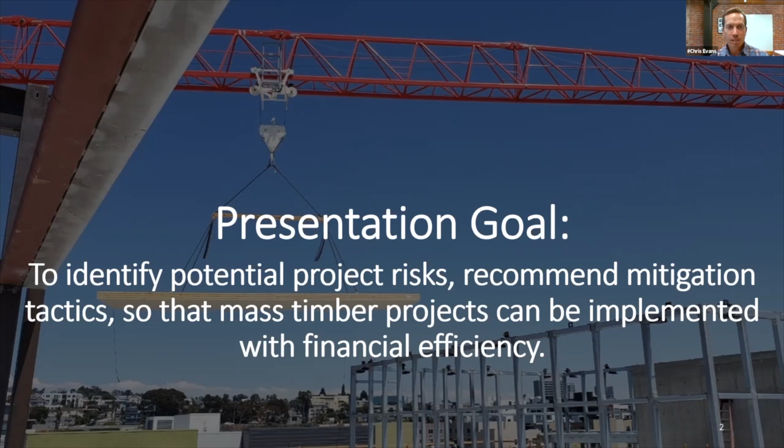So today, we want to identify what some potential risks are, educate people of what those are so that a detailed plan can be put forward so that we're not just throwing money at risk, but we're throwing a detailed plan to capture risk mitigation. Here's an overview of the learning objectives for today in our presentation, and we'll go through these in more detail.

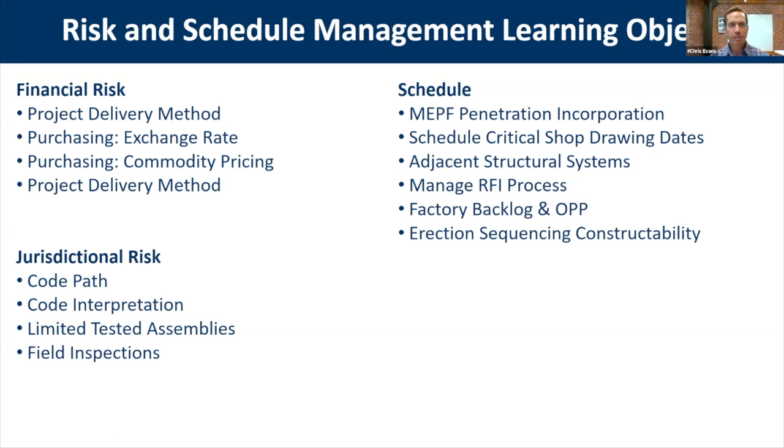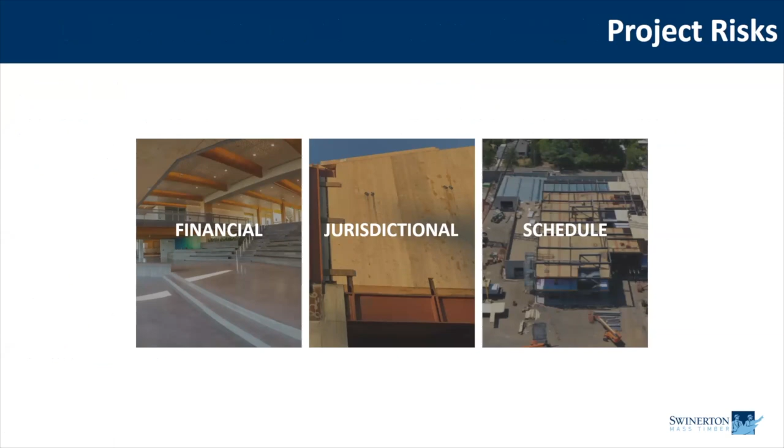Okay, so financial risk, jurisdictional risk, and schedule risk. These are the three main subject matters today that we're going to discuss. And we'll start with financial risk. So project delivery method. We'll go into details on why that is a risk to the project financially. Purchasing with exchange rates, and purchasing with commodity pricing.

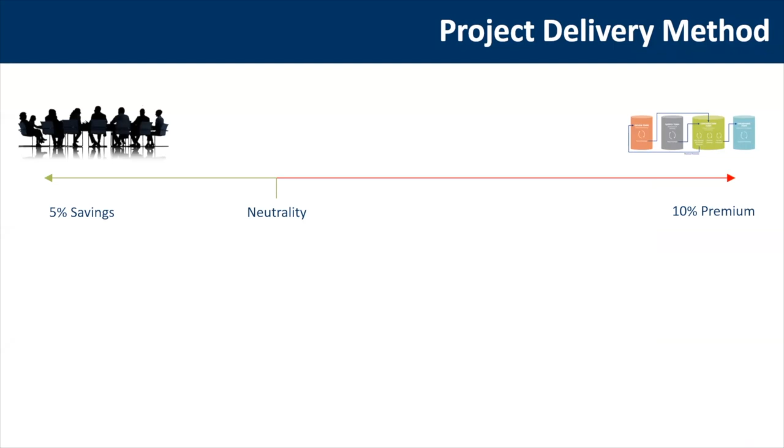So first, our project delivery method really has two different approaches. In the first approach, we have the CMGC, Design Assist, GCCM, design build type of deliveries. Really, we see that as a bunch of partners sitting at a table, joining hands, teamwork together to start to solve problems and plan out the project. Teaming approaches early in the project's design cycle, we really feel is a benefit with mass timber.

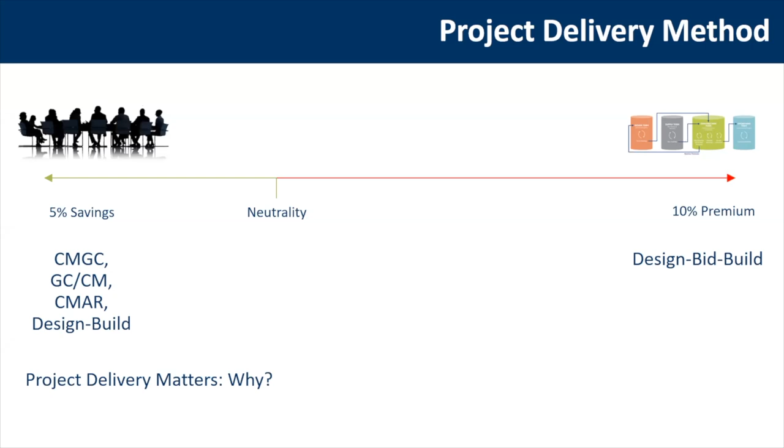On the right side, a design bid build approach, really more traditional approach in procurement of projects. We'll talk why there's some not so good things about that type of approach with respect to mass timber buildings. So project delivery matters, but why? First, there's a ton of new products, new lingo, and new things to think about.

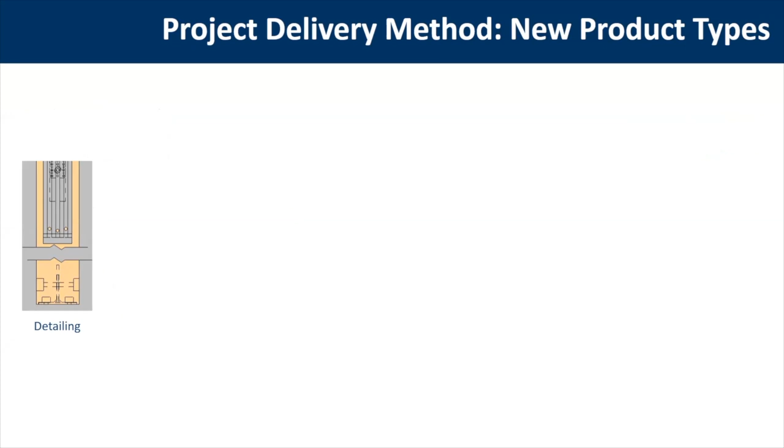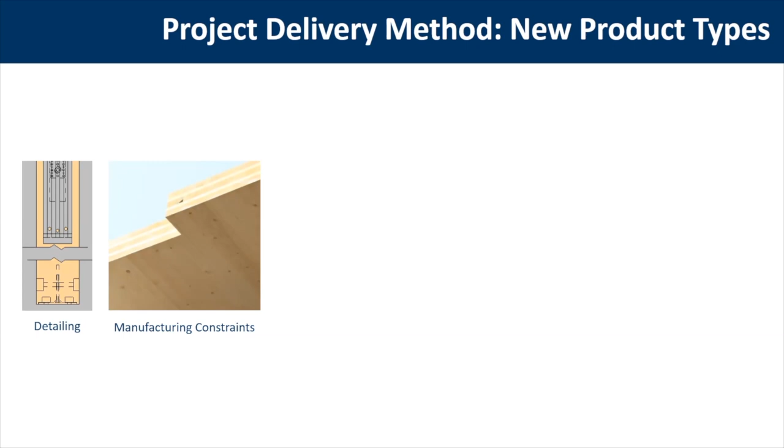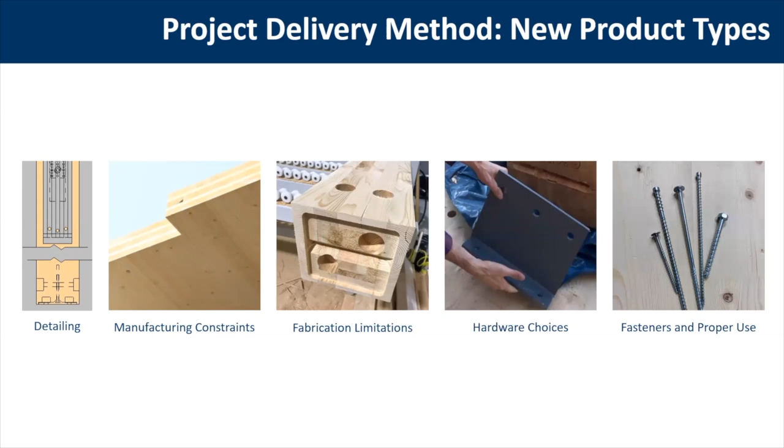The detailing effort that's required to go in to make a prefab kit of parts approach for a mass timber building. The manufacturing constraints. Each manufacturer has different setups in their facilities, which then impart different constraints to what they can produce. Fabrication limitations. Each different type of CNC machine does have limitations on fabrication. There's a ton of different hardware out there as well, proprietary hardware or custom hardware. And then finally, fasteners and proper use of fasteners. There's a lot of different fastener types.

So the risk here is that there's new and unfamiliar products, and that can lead to not optimizing the design. The goal of partnering is to get educated on what these constraints are, limitations, and proper uses, and gain that technical knowledge and know-how from industry experts to save money on the project and get to an efficient design.

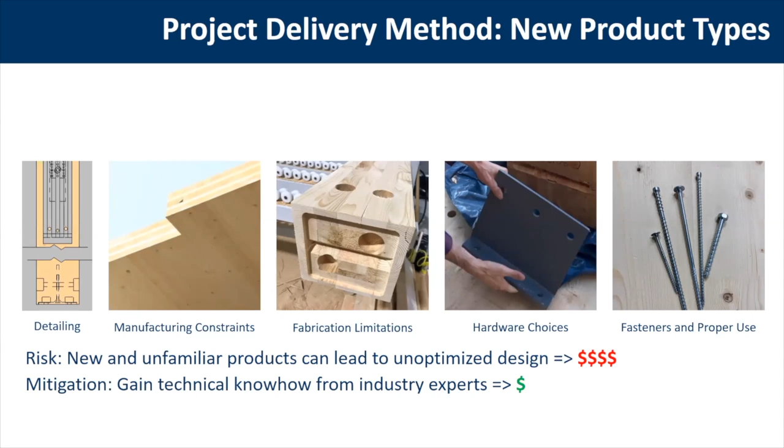If you really think about it in a sense, we've been building with steel and concrete for many, many years, and everybody's very familiar with how to put those systems in place with an optimized design. The first go at a mass timber building, though, we don't have those years and years of lessons learned like we do in those other industries to get to a comparable optimum design. So the goal is get partners on board so that we can get the lessons learned brought to the team and get that first pass of design to be very efficient.

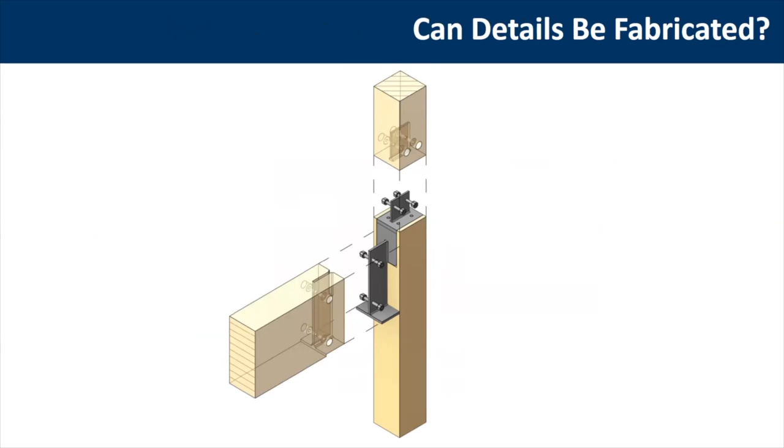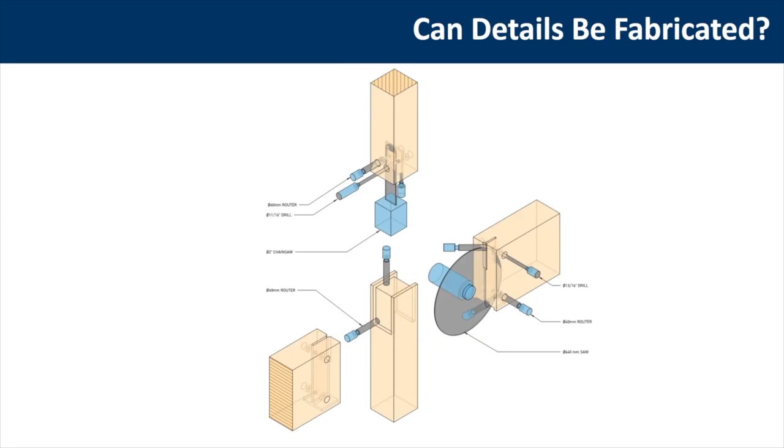Okay, so big question is, can details be fabricated? It was one thing to look at a set of plans in 2 dimensions. It's another thing to start to bring that into 3 dimensions. But looking at how it gets tooled and cut is really important. That's something during the design process to look at the constructability, or rather fabricatability of certain details, and understand, can a CNC machine cut those details, or is it fabricatable? What do we need to do maybe to alter design slightly to make it more efficient and more cost efficient with CNC time?

Next, exploding those details and really understand if it can be installed. Are there limitations or issues that cause those details not to be installed efficiently or to cause pain during installation? In a nutshell, if we get to really well fabricated details in a mass timber building, it usually leads to easy to install details out in the field. That's the goal: quick install in the field and fabricatable details.

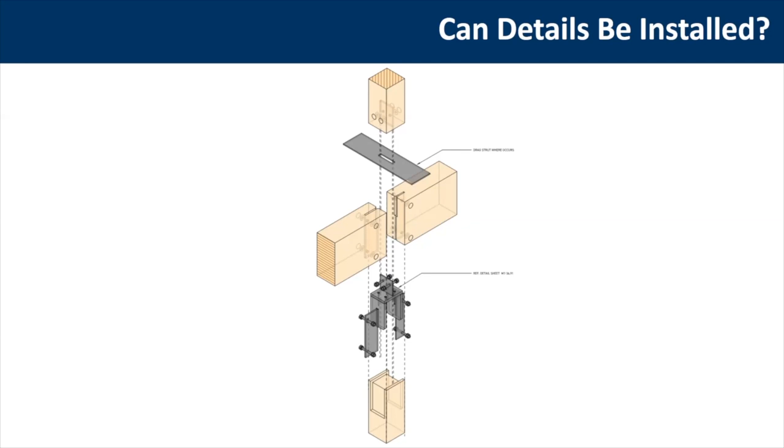So one aspect of why the design assist approach works in reducing project cost is getting to an optimized design by making sure that the details of how things come together are well coordinated.

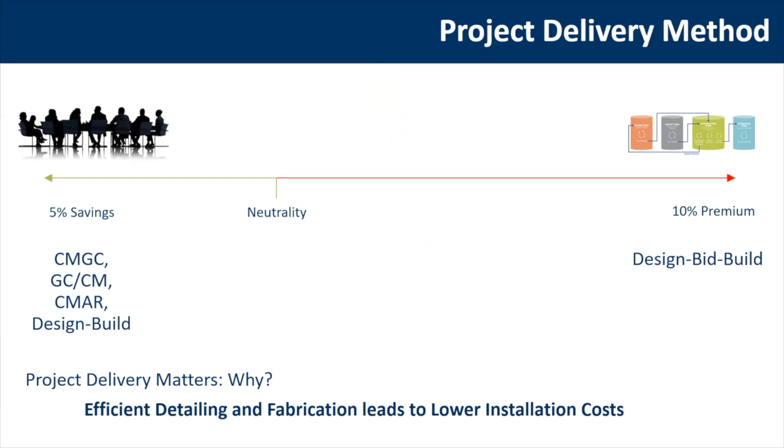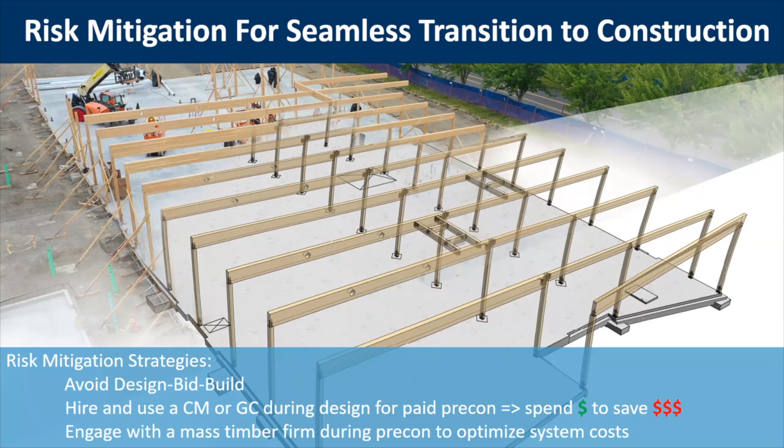Risk mitigation strategies: avoid design-bid-build, hire and use a CM or GC during design for paid pre-con. Spend a little bit of money to save money on the project. And then engage with a mass timber firm during pre-con to optimize system costs.

That is substantial. The margins on these projects with contractors and suppliers going at them is not that great. That exchange risk is passed on to ownership and contracting teams. So it's a risk for the project. We need to be conscious of that. So how do we be conscious of that? We get ahead of it.

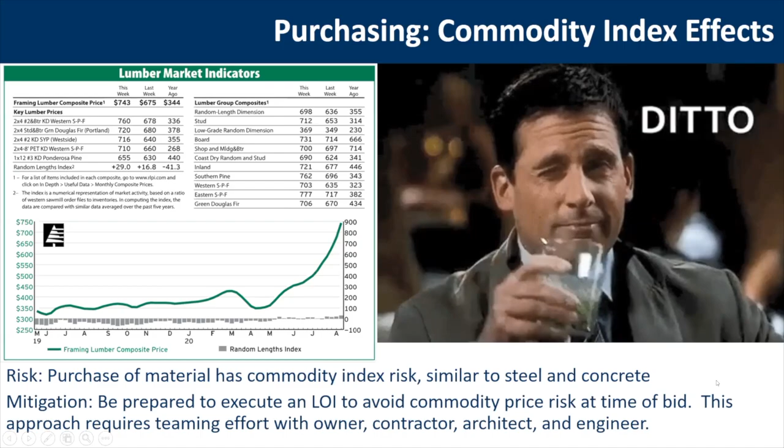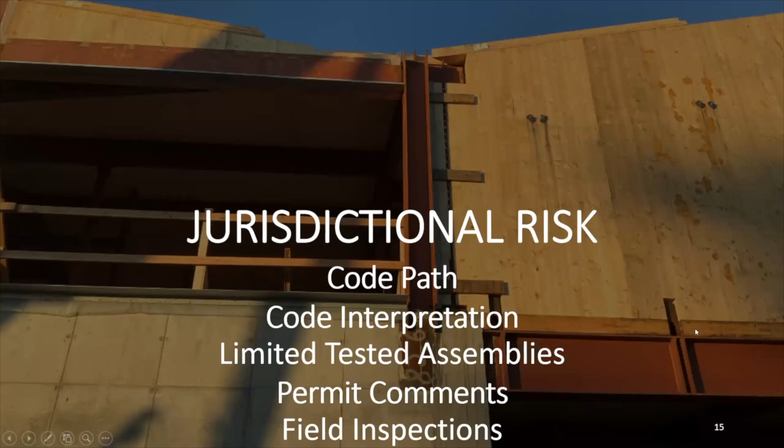Okay, jurisdictional risk. Code path we'll talk about: code interpretation, limited tested assemblies, permit comments, and field inspections. So we have code—which code are we going to use for a project? The 2012 IBC, the 2015, the 2018. It all depends on the local state codes, what has been adopted, what modifications have been made, and really how they interpret it. Local code adoption influences what can or can't be done. There are differences with the use of mass timber just from 2012 to 2015 IBC. So it's good to know what the current code is for that jurisdiction and what is allowable.

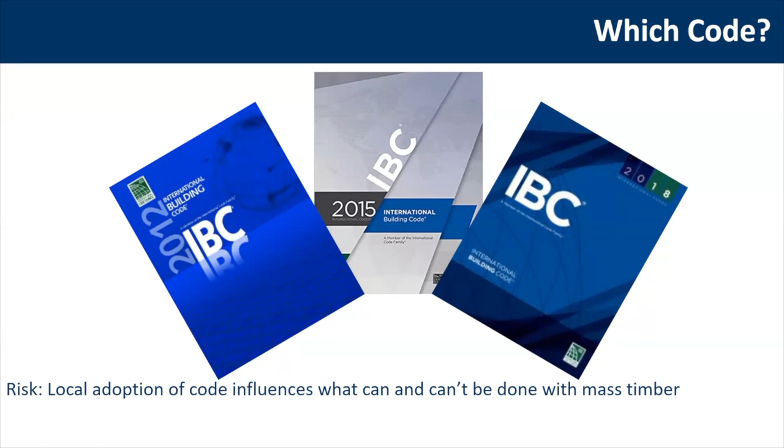Understand the code path and required variances at inception of the project.

A quick anecdote: the 2012 IBC for a Type 3A building doesn't allow CLT in the exterior assembly, whereas the 2015 code does. In a case in Oregon, we were under the 2012 IBC. One jurisdiction allowed us to use CLT in the exterior wall and approved a variance, while another city did not allow that. It's all based on local interpretation of code.

So what that means is each jurisdiction interprets codes slightly differently. The thing we have to do early on is meet with the authority having jurisdiction, have a pre-app conference, sit down with them, and discuss what the project is, what the project goals are, and what we plan to do.

See how they're going to interpret the code, what they see as risks for them, and then come up with a plan to mitigate those risks early in design, so those strategies can be put into the design documents. Then document and circulate those meeting minutes to ensure the team is on the same page.

This little step of being proactive with the jurisdiction will reap many good benefits, and we highly urge teams to do this. Okay, limited tested assemblies.

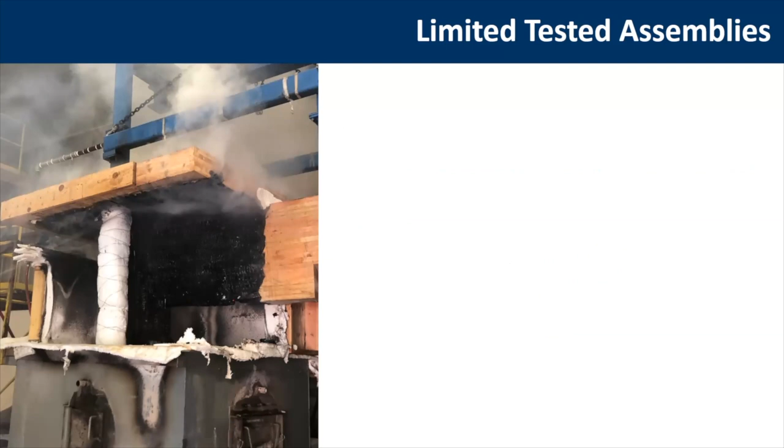There are limited tested assemblies. There's a lot, we're not going to list them all here, but we'll talk about a few: 2-hour shafts through non-rated and 1-hour rated floors, 2-hour rated timber-to-timber connections, limitations of tested connections, and loading in kips.

A good example would be 2-hour rated connections. There's a limited number that have been tested and approved. Certain manufacturers have gone through and gotten some of their own 2-hour connections tested.

But with the new Type 4A, B, and C buildings, which really require 2-hour rated connections or better for exposed members, the easiest way to go about it is having a tested assembly that was load tested under a fire condition.

The thing to really understand is it's not just about the minutes involved in getting these approvals, it's also about what the loading was on those types of tests. So tested assemblies may be required, and it may actually be more efficient for the project to proactively get a certain condition tested.

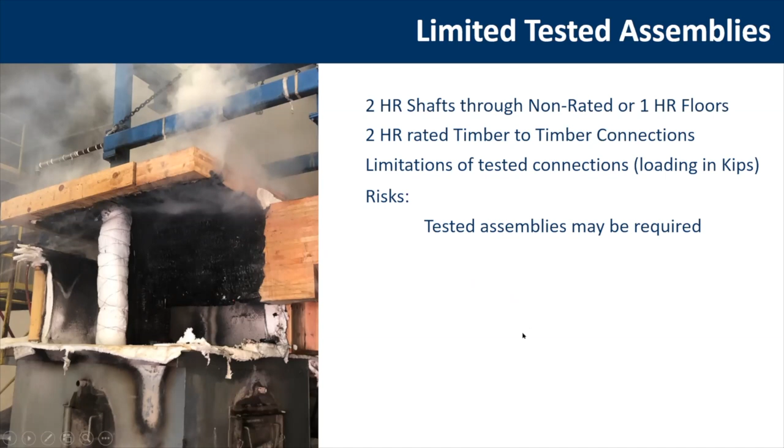The mitigation is to engage with consultants and system experts to determine what project details require engineering judgments or project-specific testing. This is really important early on in the project, to identify what would ever need an engineering judgment or project-specific testing if required.

Some projects are on the cutting edge, some aren't. So it's worth having that discussion early and figuring out what those project risks are, and again being proactive and getting ahead of it with a plan.

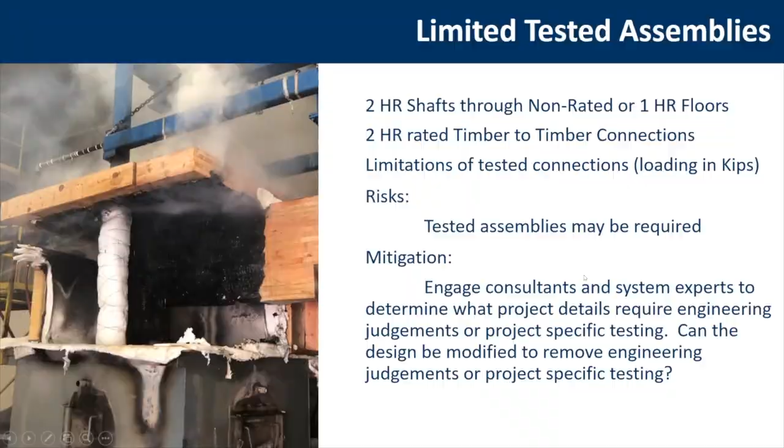Next, I love schedules. It's like my second favorite thing. Schedules are so much fun.

So, permit comments. It's really important to think that most likely permit submission and the shop drawing process are going to overlap. That's most likely going to happen on a mass timber project. It's important if we think about mass timber as a prefabricated kit of parts—we need to be proactive and do shop drawings early in the process after permit submission is done, but we're probably going to be waiting for jurisdictional approval and permit to be issued.

So most jurisdictions will provide early in the review process structural review comments. It's important to put this into the schedule for when that expected date is, and ask the jurisdiction how long it usually takes for their first review to get those comments back. Put that into the schedule and tie it to the logic with the shop drawings.

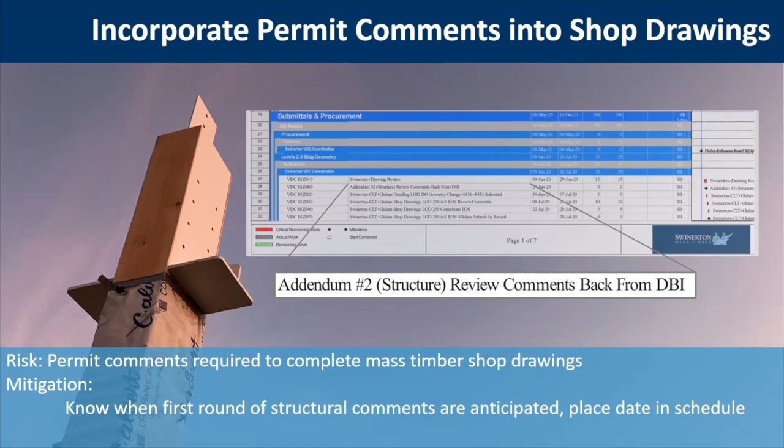There will be things that the jurisdiction has marked out that they're concerned about that didn't come through at that early meeting. You want to avoid a change in the middle of shop drawings, or after they're done, or when you start fabrication. So knowing this date and having a plan centered around it is important—not only know the date, but put it into the critical path of the schedule so the logic ties, makes sense, and is in front of everybody.

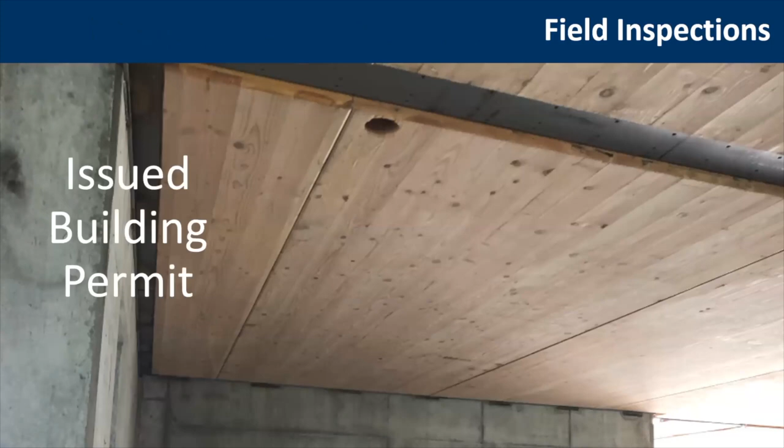Just because a building permit's been issued does not mean that it's approved for inspections. So what does this really mean? Approved permits are one thing, having a building permit and a document set. But when the inspector comes out, they're the last person that stands in front of commissioning that building, and they might view things a little bit differently, have a different code interpretation.

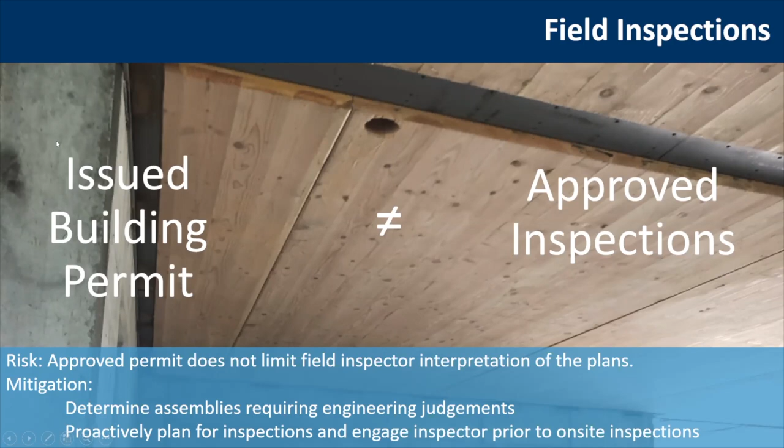So it's really important to be proactive, determine any assemblies that might require an engineering judgment. If there's not a specific UL assembly for a wall detail going into a floor slab, for example, you might need tested data or an engineering judgment to support that. Get ahead of that, understand which details might require that, and then also be proactive with the inspector. Have a job start meeting with them, sit down, walk through the project, see if there's any red flags that immediately come off the table, and engage them in the process so that they're your partner.

Okay, schedule risk: MEPF, penetration incorporation, schedule critical shop drawing dates, adjacent structural systems, manage the RFI process, factory backlog, and OPP. So we'll go into all of this. And then finally, erection, sequencing, and constructability.

Early MEPF involvement leads to schedule enhancement. If we do not engage our MEPF partners early in the project, we can't take full advantage of CNC capabilities for our wood products. Most of these wood products are going to be prefabricated offsite, hardware installed offsite, being cut on a CNC machine to allow the hardware to set in for easy connections in the field, and then brought out to site as a prefabricated kit of parts. That leads to the efficiency in building these structures. You're already there with that piece on the CNC machine.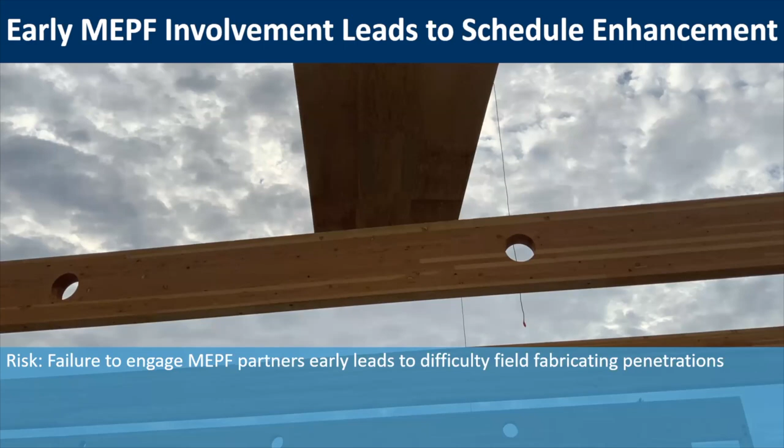This is different than concrete construction procurement, where you can do your MEPF coordination much later in the game. So that's why this is so important. It is a different mindset than building a concrete building. We have to bring this up into the project schedule and really understand that. So take advantage of the CNC technology.

Get this scheduled. And so when we're speaking of schedule, having a shop drawing schedule that's detailed and understood - at the top of this we see gray bars. The gray bars are for the design deliverables: the DD phase, the CD phase, the construction administration phase.

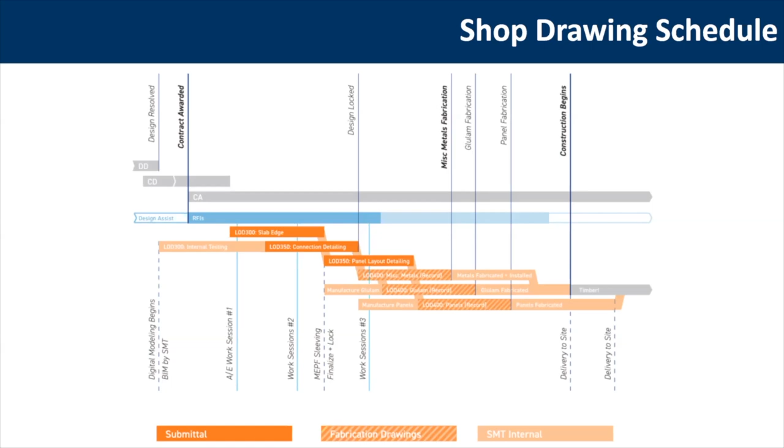And then on the hard orange, solid orange, are certain submittals. You're going to do a submittal for shop drawings on your slab edge, a submittal for the connection detailing and how the hardware comes together, and another one for your panel layout and detailing. Those connection detailing and panel layout detailing include those MEPF penetrations and sleeving. It's really important that we get that stuff brought in early. This really reiterates the need and desire to have a partnering approach to these projects, a design assist approach where we can bring on trade partners early to help facilitate efficient building out in the field.

Modeling of adjacent structural systems.

We don't want what happens in this picture to happen. This is a picture of a CLT panel having to be field cut to handle something that wasn't built per the model. The CLT in this case was built per the structural model, as was the steel, but we have an issue where the concrete wasn't built to that model, and it's harder to get the concrete modeled.

For foundations, basements, things like this project, contractors aren't used to coming in and providing that technology all the time. So having a plan not only to get the adjacent structural system modeled, but also making sure we're building to that model is important to limit waste in the field.

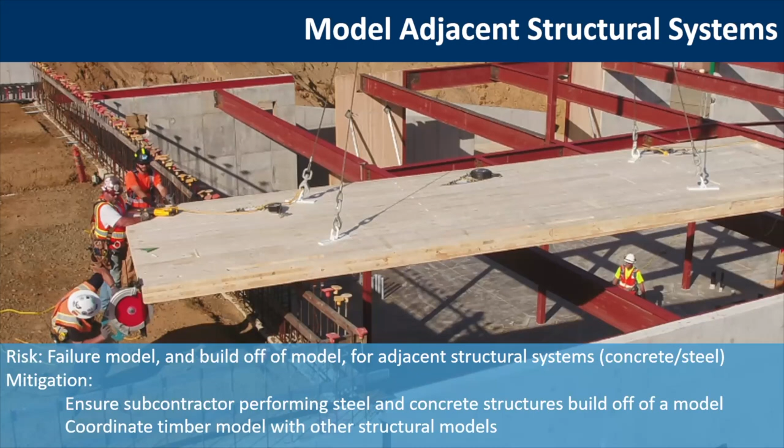What we see here is someone taking the picture, someone cutting, and a few people standing around, and probably a couple other people not in the picture that are equally standing around, all while we have a panel on the hook.

This is definitely the condition that we generally want to avoid. Okay, I promised not many construction details in black and white, so here's, I think, the only one of this presentation. So, RFI submission and response timing. The RFI process—there will be RFIs in a timber building, in most any building.

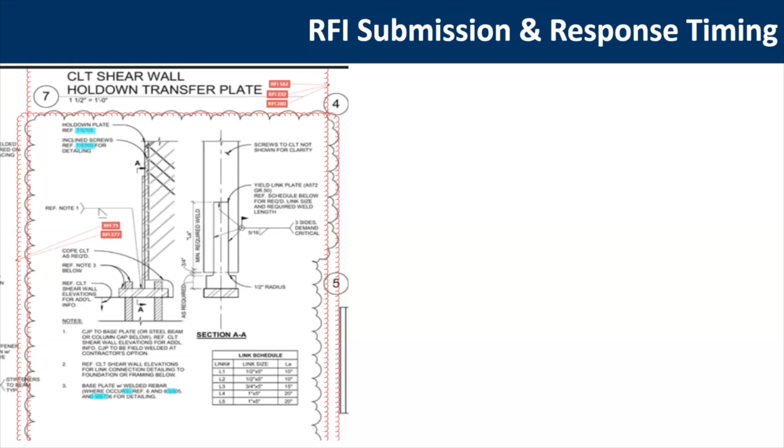What's important is that RFI generation usually starts at the highest level when detailing starts in the project. There might be questions about where the building sits, where it lies, what are the exact dimensions, and that RFI process needs to be quick and succinct.

So a protracted RFI process will lead to delays. It will delay fabrication drawings and development, and could push procurement or things to accelerate getting procurement done.

So what do we do? We look the RFI process in the eye and say, as a team, let's get through this quickly. Let's not have the 10 to 14 day response time for each individual RFI, but come together as a team and ask the RFIs quickly, then have teaming meetings scheduled over a 3-week period where you can have a couple meetings per week and get through the issues really quickly, talking through it as a team and agreeing on the path forward.

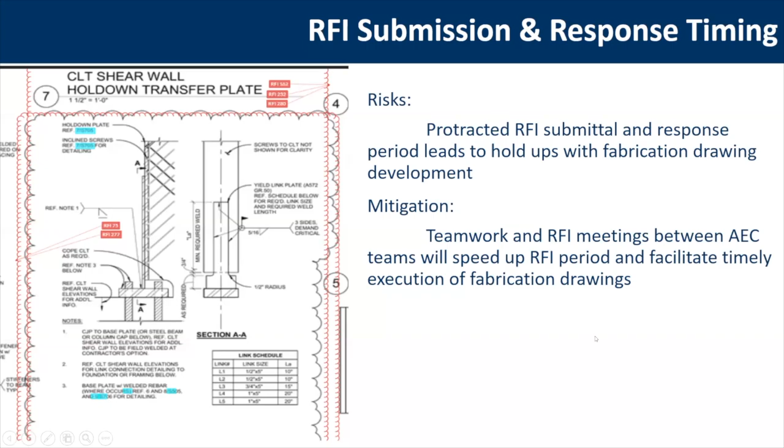Next, factory backlog and other people's projects. We take care of risk the whole way through for our project, mitigate risks, and do everything right. But at the end of the day, we're still getting a product manufactured in a facility, and there are other projects ahead of us. So when it comes time to procure and bring a manufacturer on board, it's really important to know what other people's projects are in front of us.

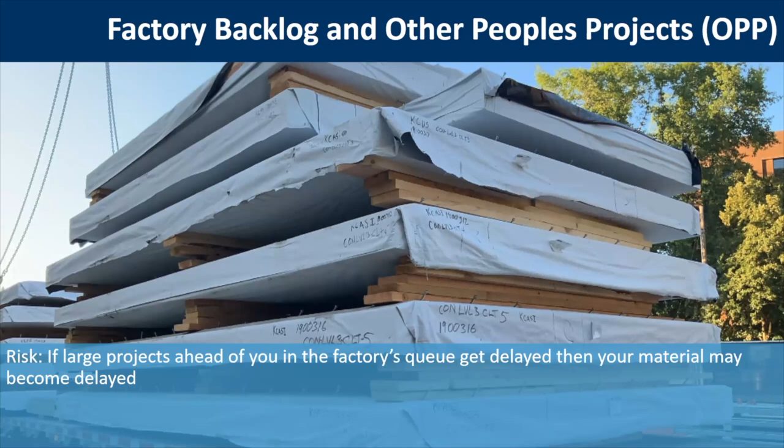There could be a mega project in front of your project, and you really want to know that. What is the risk on that project? Does it have the risk of being delayed? What happens if it is delayed? What's the contingency plan? What's the mitigation plan?

Understanding what is in the factory's queue before your work is really important. It's a great question to ask of your manufacturing partners when you get down to that time where you're analyzing bids and getting ready to secure a partner.

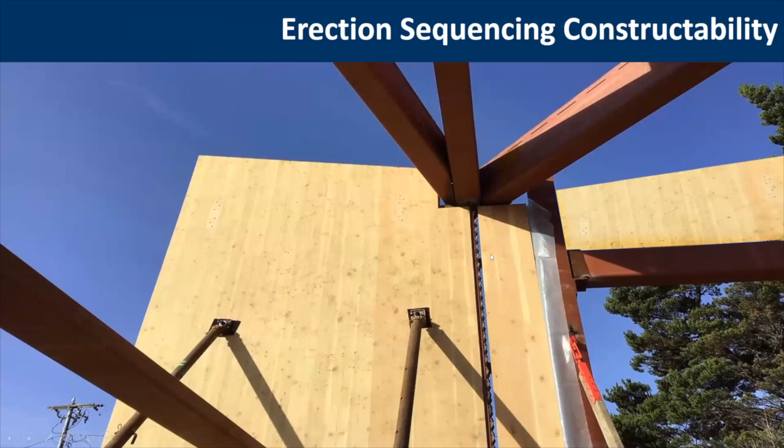Okay, the last series of slides, with about a minute and a half to go. Erection, sequence, and constructability. It's really important to think through how the building is going to be built, and in what order. In this case, on this building, there are two different subcontractors: the structural steel subcontractor and the CLT installer.

On this building, this panel had to be installed first with a welded hold down that tied into the structural system below. Next, once that was installed, this column and beam could be set, allowed to be set for details down on the foundation. Then once that was set, you could finalize by putting this infill CLT panel in, then throwing on these beams on top, and putting in the CLT panel on the side.

So if you think about that, that's quite a series of events going back and forth between two contractors to make the building work. This was on a design-bid-build job, not one with design-assist procurement. If it were design-assist, the goal would be to identify that this coordination issue was going to happen and cause problems, then find a strategy to mitigate this sequence on the project.